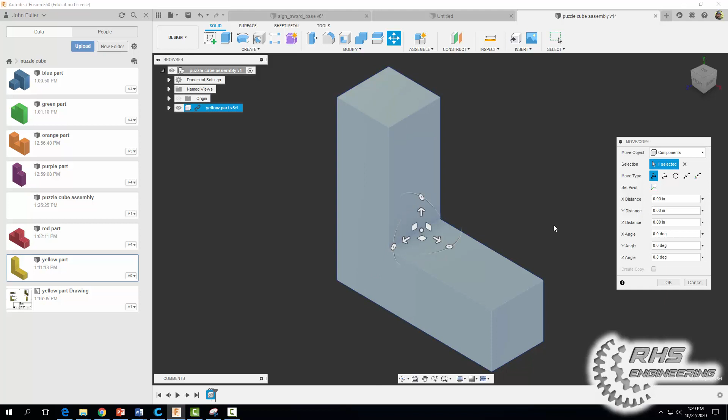Let's go ahead, I'm going to bring in my yellow part here, right click on it and insert into current design. And I'm going to move it around so it looks something like that, and hit OK.

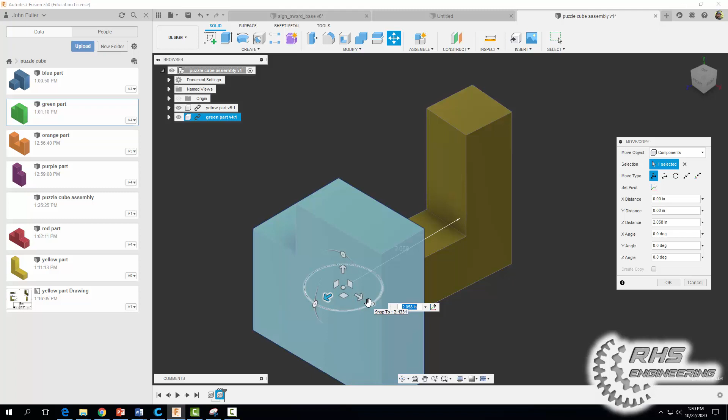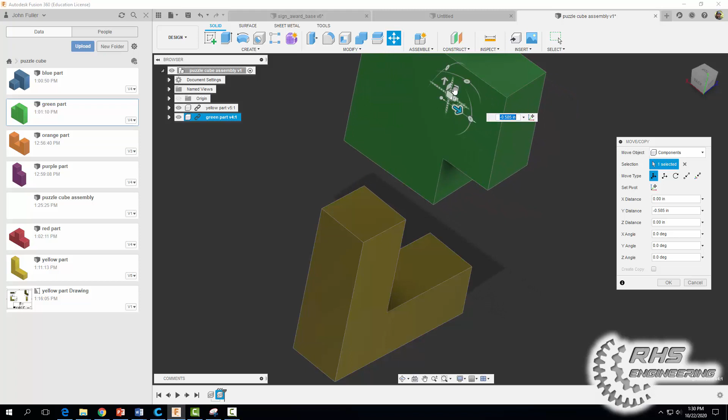Now I'm going to bring in my next puzzle cube piece, right click, insert into current design. I'm going to arrange it now sort of like how they come together. If I was to physically put these two pieces together, they'd probably be something close to like this. So I'm going to arrange them similar to how you would assemble them. They're kind of close, and I'm going to hit OK. That looks pretty good.

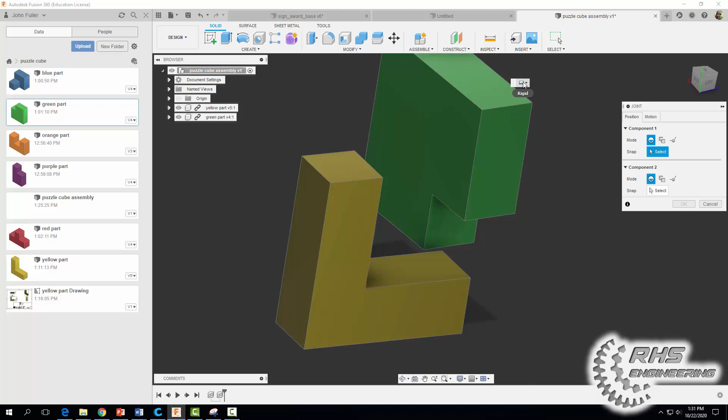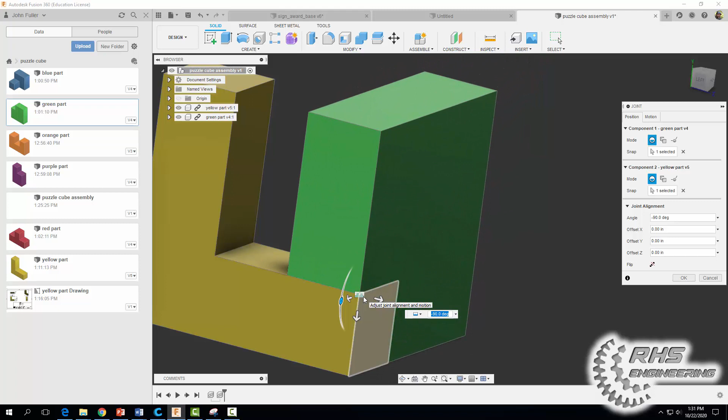Now I'm going to assemble them with what's called a rigid constraint. I'm going to come on up to assemble, select joint, and by default your rigid constraint probably already shows up. Now I got to think, if I place these two puzzle cube pieces together, which points are going to match up with one another? I think that point right there will match up with that point right there. Yep, that's exactly how I want it, and I'm going to hit OK.

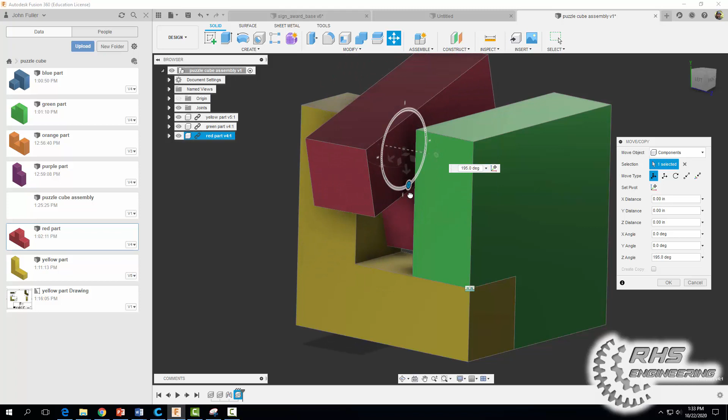Alright, now I'm going to insert my third puzzle cube piece here. Once again, I'm going to arrange it similar to how it actually comes together to form my cube, so it looks like it's going to fall into place. Maybe move it back a little bit, that looks pretty good. Maybe move it a little bit forward, something like that, and hit OK.

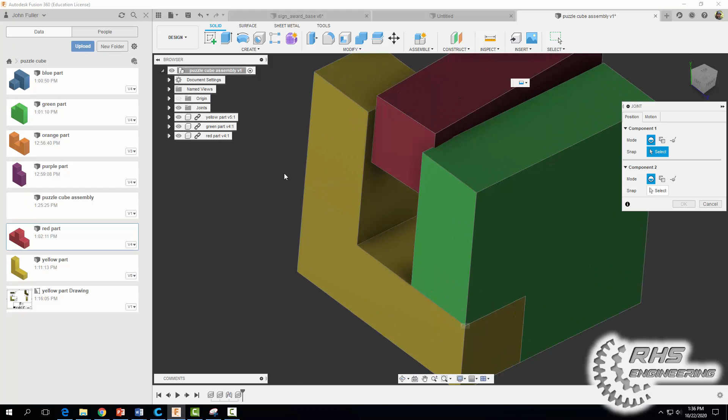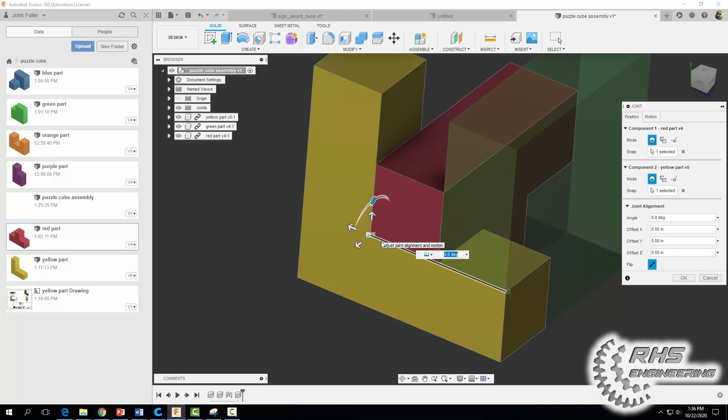Once again, I want to come to assemble, and I'm going to add another joint here, and it's going to be a rigid joint. A rigid joint will lock it in 3 dimensions, so it's a pretty basic joint. Now I got to think about which points match up with my other parts' points. I know this corner right here will go with this guy. Let me rotate it around a little bit. There, okay, and I'm going to hit OK.

Alright, so now I have 3 puzzle cube pieces all placed together just like how I want them. Now I'm going to go ahead and insert my fourth part here, and once again arrange it so it sort of looks like it's going to fall into place. Let me move it out a little more.

Okay, it's going to slide right in there, so I'm going to just move it. I still need to rotate it a little bit more here. So it's actually going to go in something like that, right?

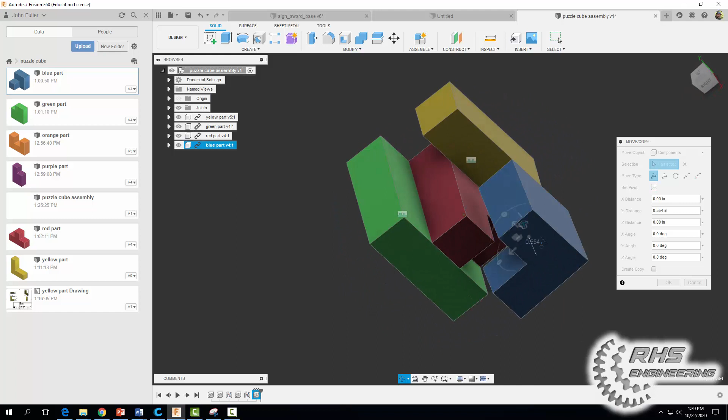Okay, hopefully you all can see how it goes in there. So now that I have it where I want it, I'm going to go ahead and hit OK.

Once again, I got to think about which points match up. I know that if I assemble this piece to the rest of my cube, this point right here is going to go to that point right there. So let's go add a constraint now there.

I'm going to go to Assemble, Joint, make sure your rigid joint is selected. I'm going to select on... let's select that one and that one. That looks good. Let's go ahead and hit OK.

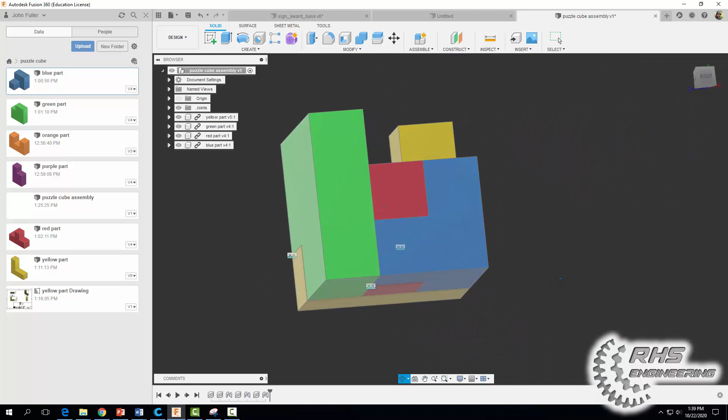All right, now let's go ahead and throw in our last piece, our purple part here. We're going to right click, insert into current design. I'm going to kind of arrange it so it looks like it's going to fall into place.

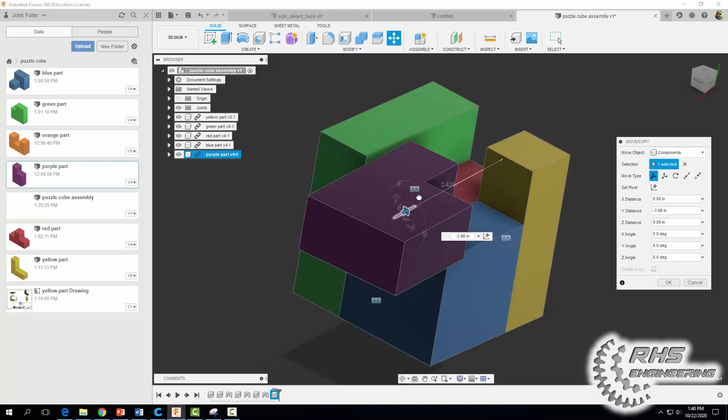There we go. I'm getting a little disorientated here. So it's going to come in right like that. Okay, so I'm going to leave it just like that and I'm going to hit OK.

All right, let's go ahead now and add our last joint here. Go to Assemble, Joint, and I know that this point right here will match up with this point right there. Okay, once again I'm going to come on over here, click there.

Now look at, you got to remember that if you want this little circle thing to move in a different plane, move it along the axis you want to get it. So I can move it, if I select that axis, it'll change directions. If I select that axis, it'll change directions.

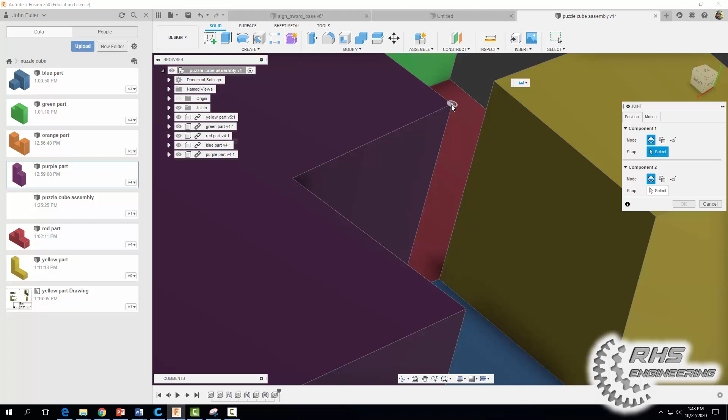Okay, so I'm going to click there and I'm going to click over here, not that one, but I want that one, right? And then hit OK.

And there is our puzzle cube completely assembled. Go ahead and save it when you're done.

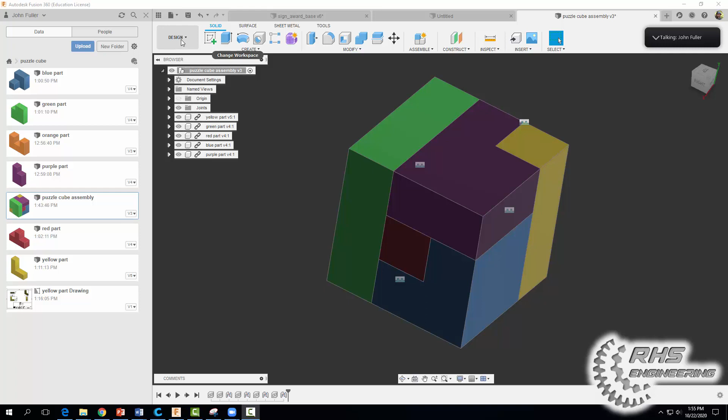Now let's go create an animation. So we're going to come on up here to Design, and we're going to come down to Animation. I'm going to arrange my cube so it's a bit more isometric and looks pretty good.

All right, so I am now going to come on up here to Transform Components. I'm going to grab this guy right here and pull him up. I'm going to pull him up 3 inches. I'm going to type in 3 and hit OK.

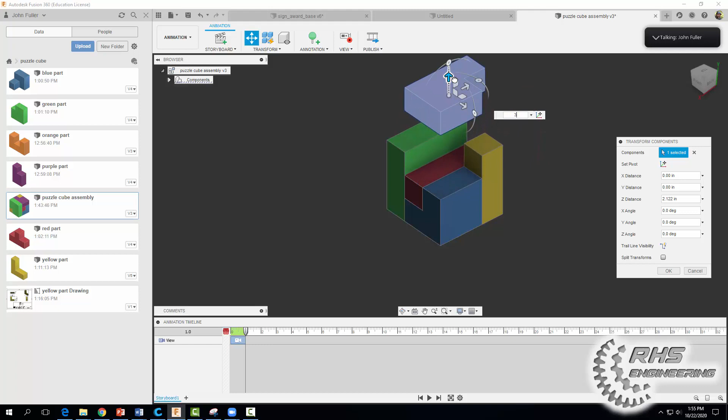Okay, now I'm going to grab this guy. Let's go transform him and pull him out 3 inches, or minus 3 inches. Hit OK.

Okay, now let's do this yellow piece. Transform it, pull it out 3 inches. Hit OK.

And now let's do the green piece. Let's see here, let's come out this way, 3 inches. Hit OK. And let's do our final red piece, minus 3 inches. Hit OK.

Now let's go ahead and hit play. And you can kind of see the animation. I'm going to right click, show trail lines.

All right, and if you come down here, you can do some pretty cool stuff. So you can stagger these, and animate them one part at a time.

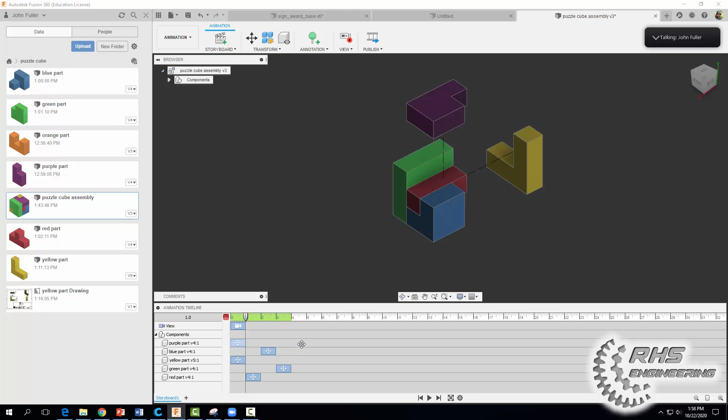And now if we hit play, you'll sort of see them come apart here.

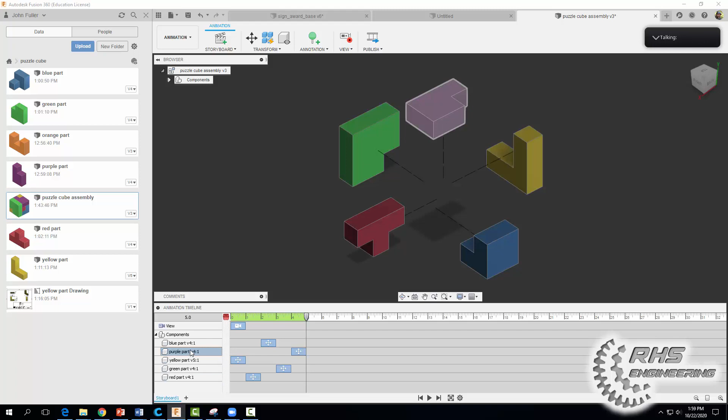And I'm going to put them in order. So I'm going to go with my yellow, my red... let's try that again.

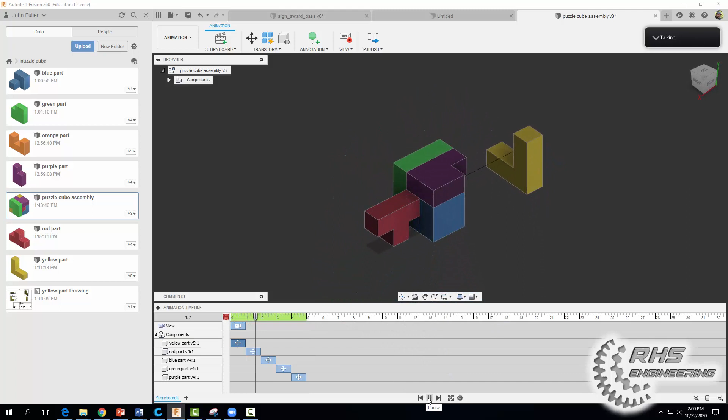And then my blue, and then my green. Now let's play it again. Let's move this zoom feature out here, and play it again. Okay, so there's a lot of different things you can do here, get it however you wanted. I'm going to go ahead now and hit save again, and hit OK.

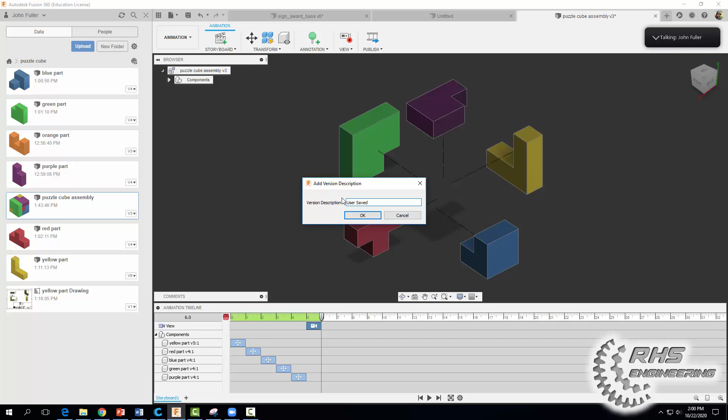Alright, so out of our animation, now we can go ahead and create an exploded view. I'm going to come up to animation, go to drawing, and we're going to do a drawing from animation. We'll select sheet size A, 11 inches by 8.5 inches, and hit OK.

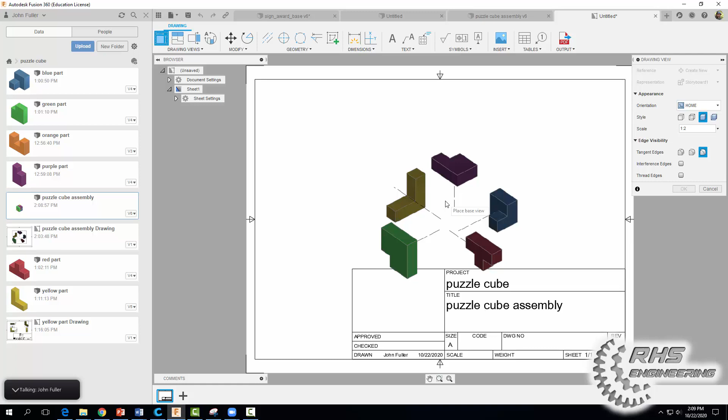And I'm going to select, just put it, let's go ahead and do shaded. I like the size, it's fine. I'm going to just click where I want it, hit OK. Then I'm going to click on my title block and delete that.

Okay, and it looks pretty good, but I want to make them a little more spread out. So I'm going to come back over to my puzzle cube, go to transform, and I'm just going to move them out about another inch or so. Hit OK, and then I'm going to save it once I'm done.

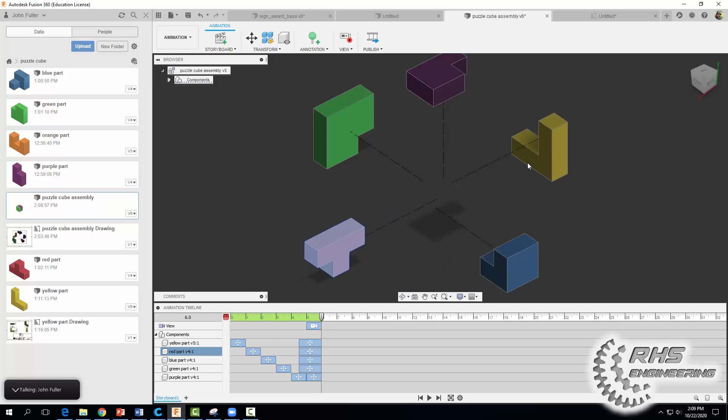Okay, and now if we come back over here, you'll see this little yellow triangle. That means we've changed something, because all of these files are linked. So we need to click there, and you'll notice now they're spread out. It'll modify the changes and accept the changes we made from the previous file. So I'm going to move this guy down now.

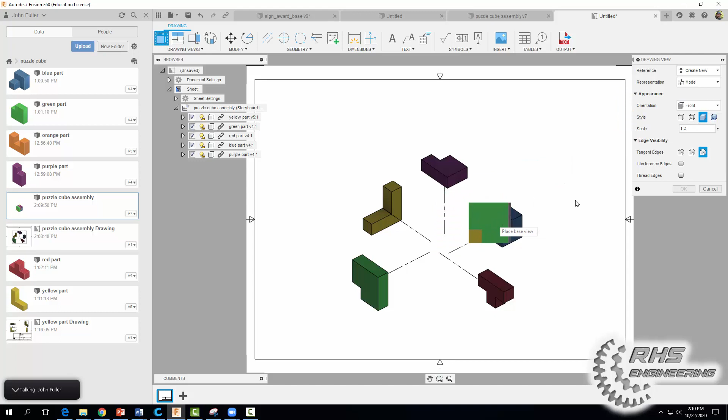Okay, and now I'm going to bring in my actual cube. Make sure this says model. I'm going to give it some color, and I'm going to select not my front view, I want my northeast isometric view, and I'm just going to sort of place it right there. Hit OK.

And the last thing we want to do now is to insert a parts list. So I'm just going to come up here to table, and I'm going to just select that, and I'm going to drop it right there.

Okay, and I'm going to change a few things here. We got our material, we got our part number. Let's right click on that. And I don't want part number, I want part name. Alright, there we go.

And let's get rid of description. And let's get mass, let's see what else is down here. Let's go with mass, okay? And we're looking good, we have everything we want, okay? And our balloons are kind of weird, but we'll fix those. Let's go ahead and hit close.

Okay, so I'm going to just kind of move my balloon here, and I'm going to make all of the balloons sort of parallel. Make them look good, right? Make it look symmetrical and like you know what you're doing, right? Okay, that looks pretty good. But we're missing our green part, right?

So to add the balloon for the green part now, just click on that, okay, and then come up to balloon. And now I'm just going to kind of... there we go. And hit close, and find that gray square, and just drag it out and make it parallel with all the others.

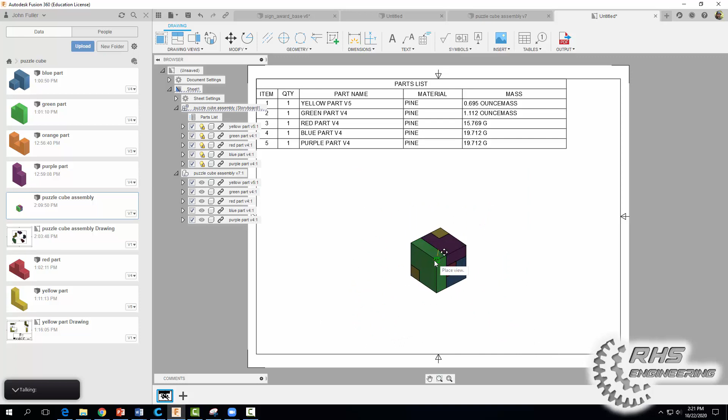And finally, the last thing I'm going to do is I'm just going to kind of move some stuff around just to space it all out, make it look a little better. And I'm going to move this balloon just up to here. Okay, move that guy in.

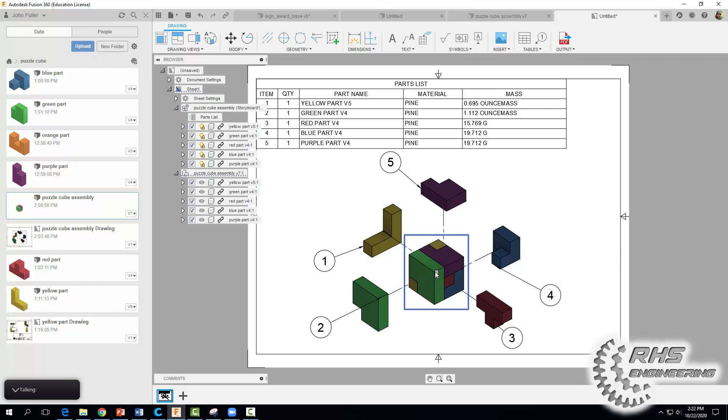And there we go. All right, there is our exploded view complete with parts list. Now, if you're like going, what's 1 pointing to? Well, that's our yellow part, right? Item 1, item 2, that should be our green part, and so forth.